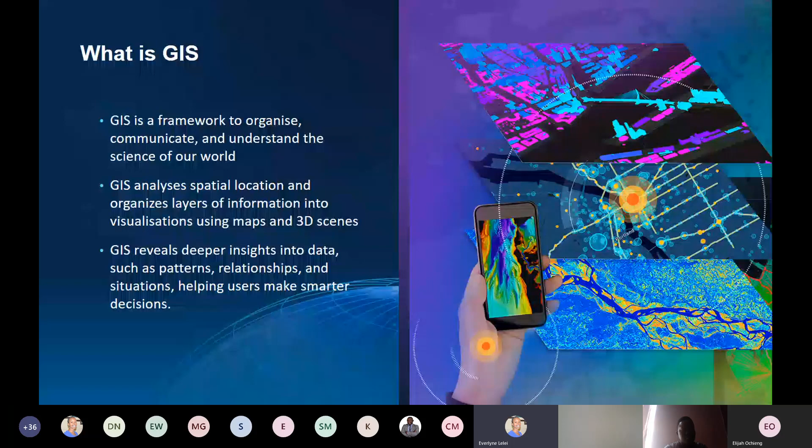So the GIS we're talking about is based on what we call the ArcGIS platform, the Esri ArcGIS platform. This platform includes distinct product offerings and solutions that work well together, with different components of this product.

We have desktop solutions and applications like ArcGIS Pro. We have applications and solutions that you could use on the web, and so on and so forth. The beauty with this platform is that you can actually work anywhere at any given time. I'm going to take us through this in a short while.

So what we're actually looking at today is GIS providing both the framework for analysis and decision making in real estate for this particular webinar. Think of the data sets where you get data integration and management, having to visualize that data through mapping and visualization. Then the core, one of the main strengths of this platform, is actually the analysis and modeling. From there, you can do your plan and design.

All these processes that we're talking about definitely lead to informed decision making, and after you've made your decisions, then you're able to take action. So this is what this platform can do — GIS providing both the framework and the process for analysis and decision making.

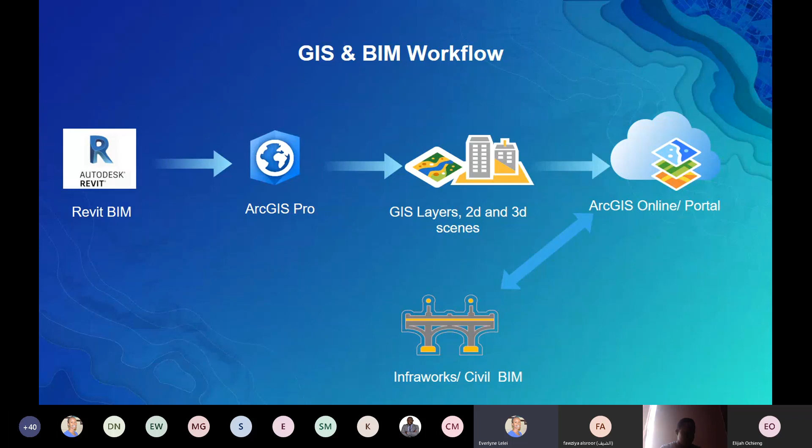So in terms of the integration patterns between both GIS and BIM, we have data in different file formats. And I think one of the main challenges has been because we didn't have the interoperability between these products and solutions before, but now that is actually possible with the GIS and BIM integration.

So you can have data sets in different file formats. If you're working with Revit, you'll have Revit files. If you're working with InfraWorks, or any other CAD data sets, you can actually have that brought into ArcGIS - that is the ArcGIS desktop, which for the purposes of this presentation is mainly ArcGIS Pro.

And then the most important thing that I also need to mention is that for this particular integration, we have the design software plugin. I think what we're mainly going to look at today is using the Autodesk connector for ArcGIS, so then you're able to connect to the ArcGIS Online platform.

So then after you've gotten your data sets to the desktop application, then you can be able to publish that to ArcGIS Online. And then on my screen, we have desktop, web, or mobile.

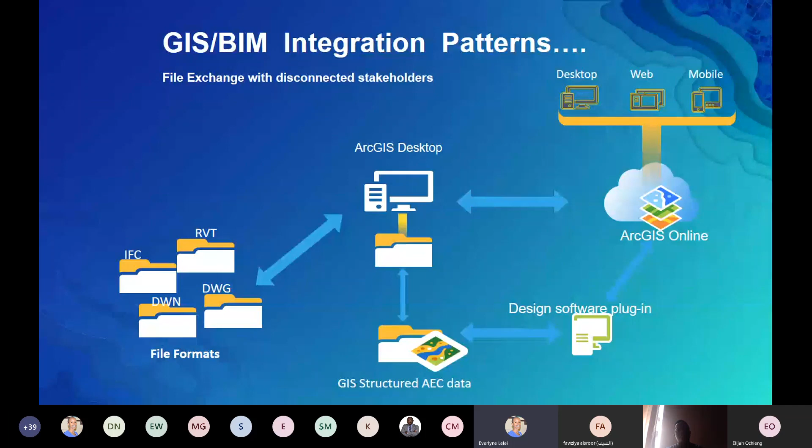So you can actually be able to create applications that can be accessed and used on the desktop, on the web, and on various mobile devices. So this is, I thought this is really important to point out even as we go through this presentation.

So my role will be mainly to show us how we can be able to use GIS to identify potential sites for real estate development. So I'm going to provide the context.

So the first thing, one of the main things that you can actually be able to do with GIS is analysis. And so before you do analysis, of course, you have to determine the criteria that you're going to use, and get the required data sets for that particular analysis that you're going to carry out.

Then, of course, there will be an aspect of reclassifying the data sets and carrying out analysis to be able to get which are the most suitable sites.

So Elijah and I are working on a project in Kisumu. I'll be taking us through analysis in the demo, showing which are the best sites that you could actually use for real estate development in Kisumu.

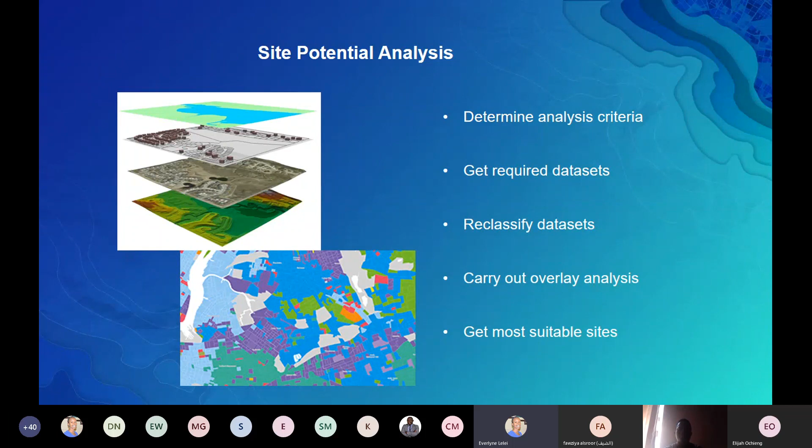So my analysis will mainly be raster overlay analysis. And then the data sets that I'm going to use, I'm going to have the DEM. And then from the DEM, I'm going to extract surfaces - I'm going to extract the slope and aspect from these.

Then one of the main other aspects that I thought is important when locating is proximity or access. So access is one of the main things that we are going to consider.

So for the purpose of this presentation, I've mainly taken those factors, but in case you need to do analysis, you can add in as many other factors as possible. But for the purposes of this presentation, I'm only going to take us through that.

So for this analysis also, we're using the model builder. With the model builder, you're actually able to automate geoprocessing tools, as opposed to having, say for example, you want to do analysis and you want to run each individual tool one at a time.

So using the model builder, we're able to automate these tools and have one final product. Since this is a multi-criteria analysis, we're considering various factors we can use for our analysis. We're mainly going to use the model builder for ArcGIS in ArcGIS Pro. I'm going to take us through that shortly in our demonstration.

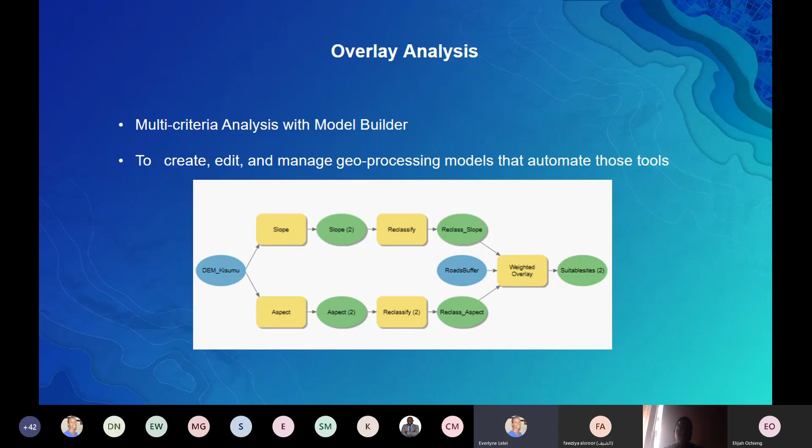Then, after identifying the potential sites for real estate development, you will go and do site assessment. Some of the factors you'll be considering are sunlight direction and wind direction, mainly for orientation, determining how you're going to orient the various buildings and facilities within your site. We're going to look at these shortly in the demonstration.

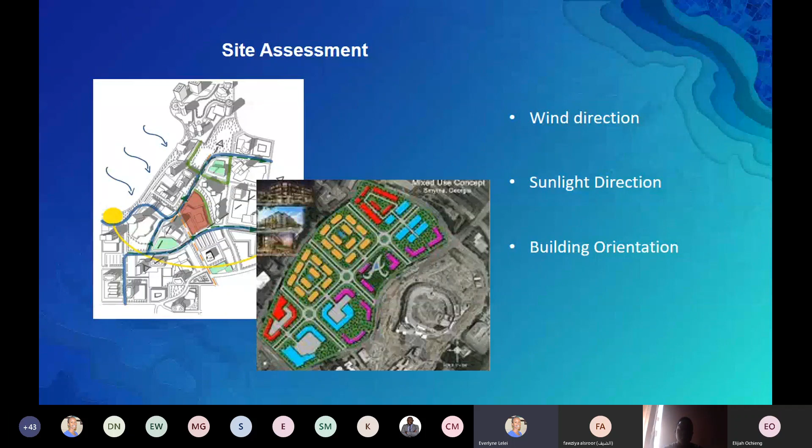So I'm going to hand over to Elijah to take us through the BIM bit, then we will go to the demonstration. Elijah, take us through the BIM bit.

Thanks, Everlyne. I'm just going to take you through a brief introduction to BIM and look at how it integrates and works with GIS. As Everlyne said, GIS provides us with the context, but BIM provides us with the content, because before you go out there and start constructing, you need to know how the environment looks, and how whatever I want to build there impacts the existing environmental and other factors. So BIM basically focuses much on the design, from design to construction and even operation of the same.

There are a number of benefits of BIM. Briefly, it is a process of creating and managing all information on infrastructure projects, both building and infrastructure, before, during, and even after the construction. So before, we are looking at the design phase; during, the actual construction itself; and after, basically the operation and maintenance of the same.

So it's the creation of a digital model of the building, which allows the designers and operators to interact with the building before it's actually constructed and after it has been constructed.

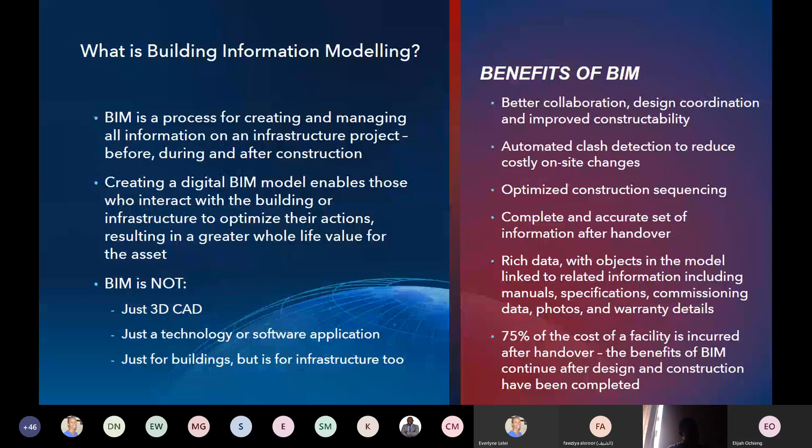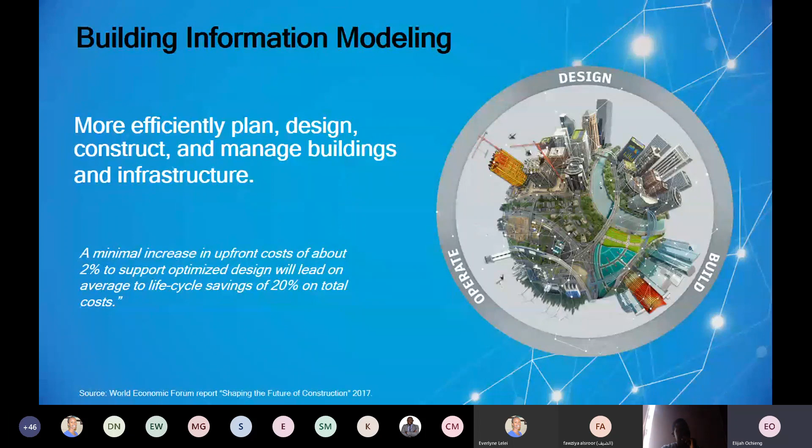You can move to the next slide, please. This is the introduction I like most: basically calling it a way of efficiently planning, designing, constructing, and managing buildings and infrastructure. A number of those who have used the process have reported at least 20% savings in the overall project life cycle, but they only need maybe about 2% to support the optimized design, basically integrating the entire process of the designing. Next, please.

When you talk about design, many people usually look at design just as one overall step, but design has been split into several phases. It can have at least 3 phases, but some can even go to 4 or 5. So when you talk about at least the 3 phases, we have the planning phase, concept, and the detailed design phase.

It's this planning phase where usually we'll find a lot of integration, trying to bring in the context of what you are designing into the actual design phase. When you do this kind of integration, where we directly integrate GIS and BIM, we'll be able to ensure better plans, which will also lead to better design in terms of operation, and also be able to identify some of the problems we usually face when we just go out in the field without trying to analyze and understand the context before construction starts.

During the BIM processes, you don't just construct, but you also have a chance of simulating the process of construction, such as the scheduling, costing, and timelines, or basically some of the issues you're likely to face when you just go directly into construction.

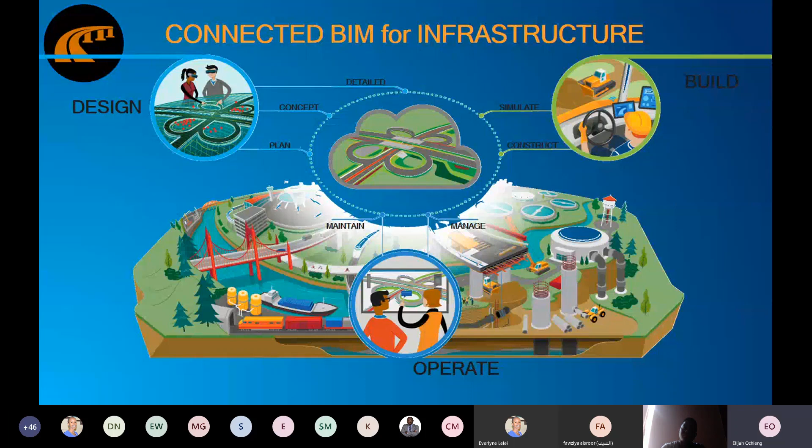And the information that was used at the design phase and the building phase can also be directly given to the authorities, like maybe some municipal, or it may be for a real estate development agency. That information can be given to them to be able to use during the operation and maintenance phase of the project that was constructed, when you use a digital BIM platform to implement your construction projects.

The main reason of this integration is basically that, as was also highlighted at some point within the presentation, the two technologies are interdependent, in that one informs the other, and the other also fuels what is required in the other technology. So BIM basically is going to provide more information to the GIS with respect to what is being provided, but GIS provides BIM with the context of what already exists there.

So BIM information is repurposed from the design data and can be a great source of information for the ongoing operation. So if the managers or the operators of the infrastructure building need to get that kind of data, they can quickly be able to get it from a BIM model. But GIS gives us the context on which we need now to do this kind of operation.

So currently, people face a number of challenges when they try to work with these two technologies together. Not that people have not been using BIM and GIS, but the conventional methods have a lot of limitations and challenges when people are trying to bring these two systems together.

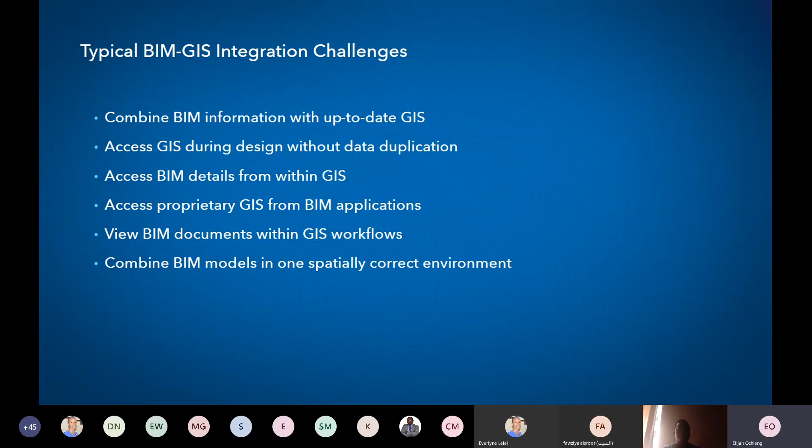Getting up-to-date information once you have started your BIM process is usually a challenge, and also accessing the GIS during the design without data duplication is sometimes a very important challenge, in that there's a lot of duplication, especially if you can't know what's the version, what's the changes that have been made over a period of time. Basically those are the challenges that we are trying to remove when we do this kind of direct integration with the two platforms.

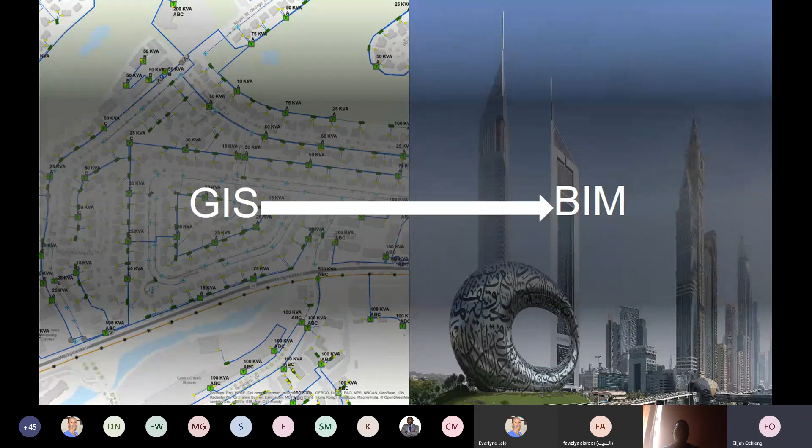So this now gives us an overview of how these two systems look like. As we had said, GIS provides us with the context. Context could be like the existing utilities, the underground pipe networks that you could be looking at within a project area - that's like the sewer lines, water distribution networks, could be the roads, could be the buildings, the conservation areas. Once we have correctly understood how they are going to impact our project, we can now finish our design work, come and construct them within the context, based on the analysis that you have done on the GIS platform, without any challenges and difficulties that are usually faced.

So in summary, the process of planning, designing, and building requires a context. GIS gives us the context, but BIM provides us with the content. Context is basically the existing roads, existing buildings, anything that you may find on a potential project site. So before you go to the actual construction, there's need for you to perform a proper analysis and understand the impact of what you are going to build there on the existing site, and also the impact of the existing site on what you are going to build.

And basically, these are some of the analyses that we'll be looking at when we're doing our demonstration - things like maybe traffic, things like flooding.

So this is how people are currently working. We say that it is very inefficient, where you need to get GIS files in different formats. You may be having PDF, you may be having raster, shape files. So when you want to work with them in your CAD, which is the conventional method right now, you need to save them in different file formats and add them manually. And once I've finished with my design, if I need to share that information again with the GIS experts or GIS specialists, again, I need to do manual export of choosing the specific files.

You need to worry about georeferencing, which is usually a very big problem to those who are not surveyors. You need to know the specific coordinate system of a project area so that you can import a raster image, or so that you can import the correct file to basically give you that context in the background to work with.

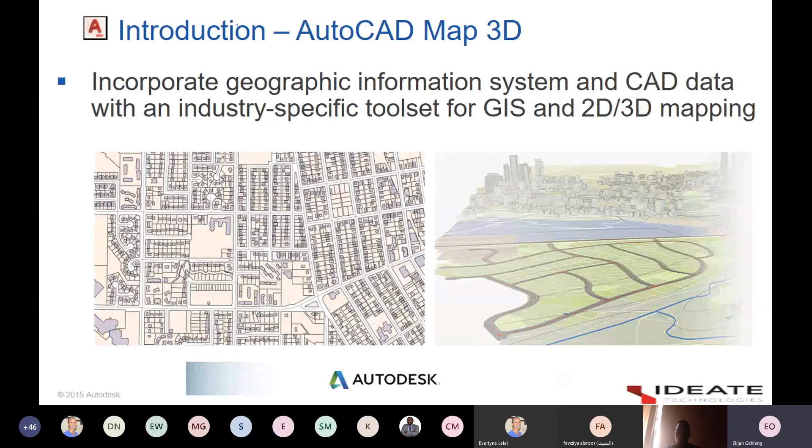If you don't know the coordinate system, this will not work. If you don't know the georeferencing of the area, that won't work very well either. The same even if you want to work with point clouds and any other kind of data that can be worked with in CAD and BIM, we all know the challenges that can present. That's why we are going to show you the best way of integrating these two in InfraWorks and ArcGIS Pro. So if you can move to the next slide.

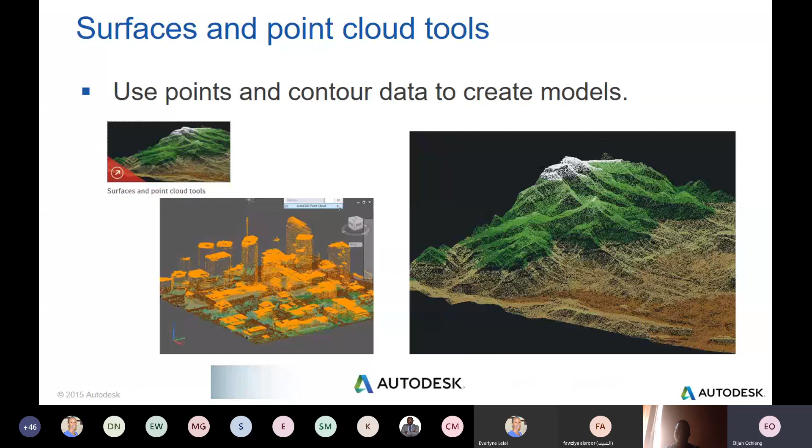The way we are proposing this to happen, as opposed to that manual integration of adding and exporting data, we are looking at a system where both GIS and BIM data can sit on one platform. Whichever phase of the project you're working on, whether planning, design, build, or operation phase, you can add into it and get feedback out of that system in terms of the design, the context, the changes, the updates, and the analysis. And that also happens during any phase of the project, whether operation or maintenance. So that's what we're looking at in terms of putting data at the center, because data basically influences everything.

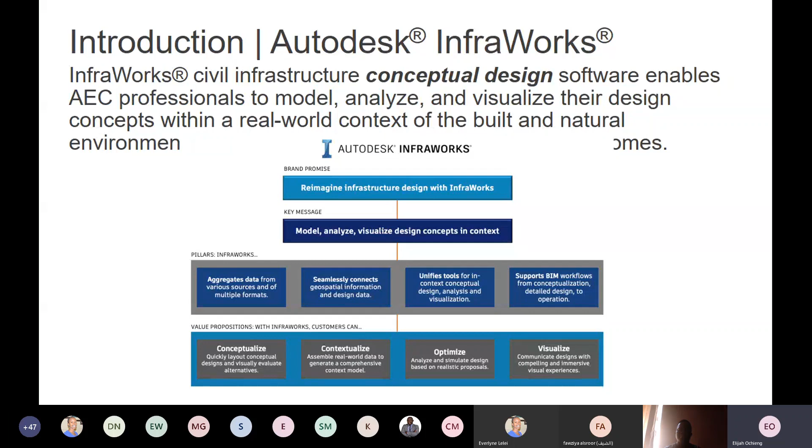The system that allows us to have such kind of integration in form of GIS and BIM, or basically GIS and design phases, is Autodesk InfraWorks. It's one of the greatest BIM solutions in the market right now, which allows you to integrate a number of technologies in terms of combining different data, whether it's data of the design phase, construction phase, operation phase, and also various contextual data in terms of GIS for that particular project area. So it has a number of functionalities and features, as you can see on the screen.

It can quickly enable you to generate the context in terms of adding the project area. When you want to start a project, it's just a matter of defining the project location, either by name or by coordinate. Once you identify the project, you create the context by defining the project boundaries, or you can import that from a predefined shapefile. Once that is done, it will give you freely available context data in terms of existing roads, existing buildings, DTM, and imagery on the background to enable your work.

Once that's done, you can quickly move into the project and start understanding what is inside it. This shows that sometimes even before you go to do surveying work on the ground, you can have some data within InfraWorks to start with. But once the survey work is completed, because survey forms a very integral part of any design process, InfraWorks will give you some information to start with in terms of the existing information on the ground.

Once the project is mobilized and the surveyor has captured some information, you can bring it in and integrate it with InfraWorks. The same also applies to the planning phase, where we now need to start leveraging some GIS data, where we can directly link up with ArcGIS Online to access the data that was generated in ArcGIS Pro based on the kind of project we are working on.

At the same time, you can now start communicating and sharing the information with the various project stakeholders at any phase of that particular project. Then after which we can now move to the various design phases of the project. Next, please.

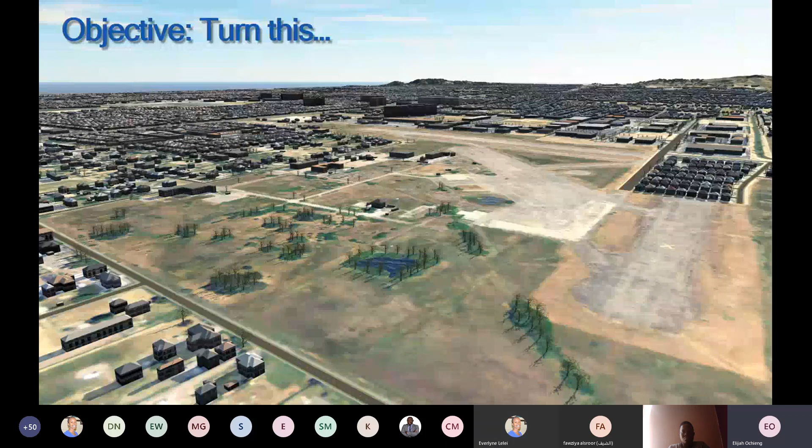The main objective of any design process is that Evelyn will be able to perform analysis and identification of the correct site, which would look like an open land with some buildings, the project area, existing roads, existing water bodies and things like that. Our main objective is to turn this into a developed area with proposed roads, proposed buildings, parking lots, recreational areas and what have you. So that's what we're going to look at: how we can start from an open land and convert it into this kind of model, which is very easy to understand.

If you've seen a building plan in CAD compared to what you can generate in InfraWorks, you'll understand this is much easier to grasp. You don't need any technical background to understand what someone is trying to depict in this project, as a non-technical stakeholder involved in a particular project, because not all players in real estate are technical.

In summary, BIM and GIS workflows are supposed to happen continuously, because the built environment changes every day. You could be walking in a particular area, and within two or three months a building is done there and people are occupying it. So both systems should always integrate and happen continuously — GIS gives us the capital portfolios, while BIM gives us the capital projects. Portfolio is basically what already exists, but BIM gives us the projects being developed now, at whichever phase they are in.

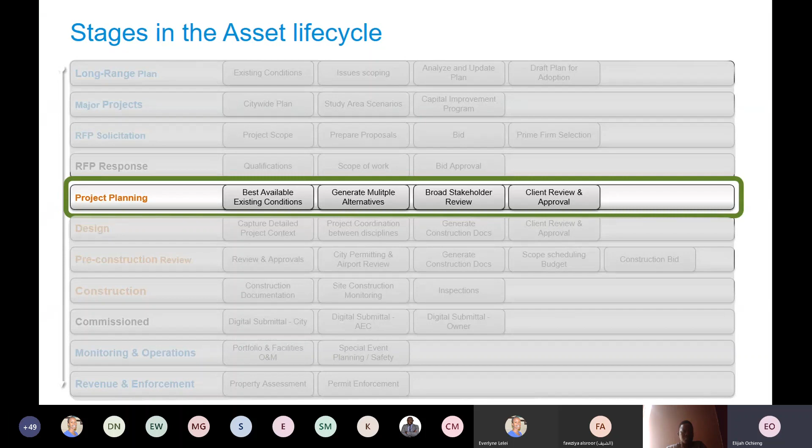All these processes can happen at any phase of the project, but today we are only going to focus on project planning — the various analyses performed, how we can evaluate existing conditions, generate multiple design alternatives, and even engage stakeholders by sharing design data without requiring them to install anything or learn the various systems we use. We want an easy-to-understand system so a non-technical individual can quickly grasp what the designers and engineers are trying to communicate.

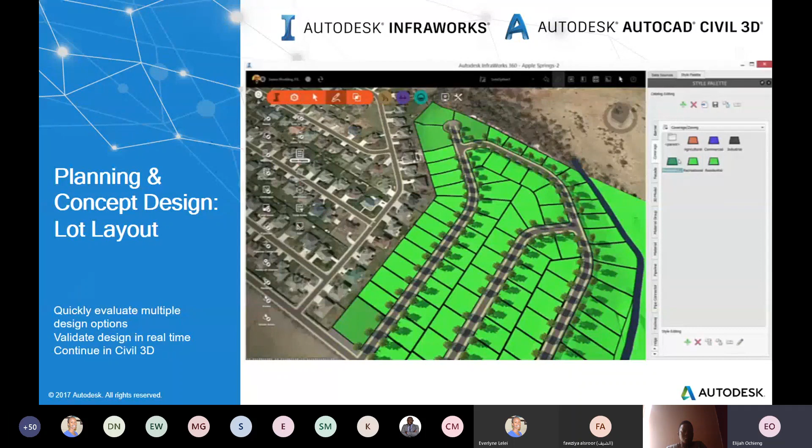For example, in terms of a plan, we want to develop something like this — common among planners, surveyors and engineers. Instead of presenting it in CAD, we can show it in an intuitive 3D model, showing the plan and how it integrates with existing features on site, like water bodies, rivers, infrastructure such as roads, trees, and so on. We'll see that in real time during the demonstration of various design alternatives. That marks the end of the presentation.

So maybe you can go to the demonstration now, starting with Evelyn.

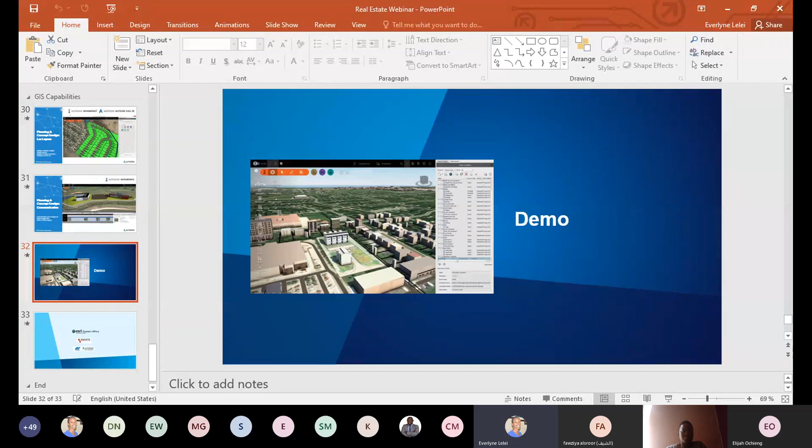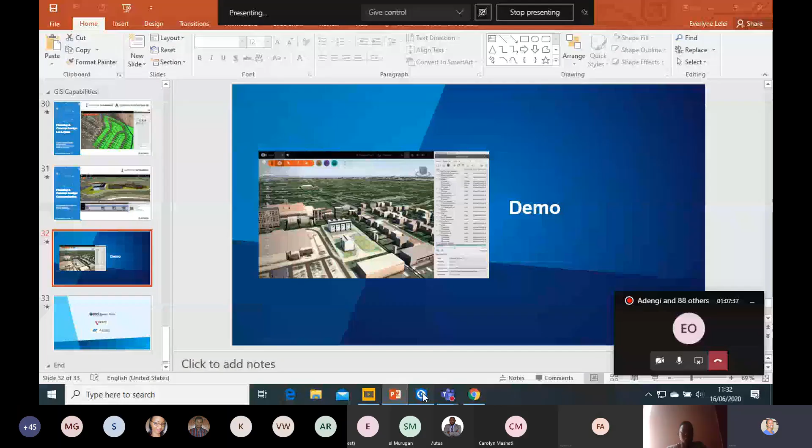Thank you, Elijah. The next bit is the demonstration, so I'm going to provide the context — just give me a few minutes to share my screen. Hope you can see my screen. This is ArcGIS Pro. I'm going to do the analysis on ArcGIS Pro and then provide the context for Elijah to do his development.

ArcGIS Pro is one of the main desktop applications within the ArcGIS platform, with a ribbon-based interface similar to Word, so it's quite user-friendly. We have various tabs — Map, Analysis, Edit, Imagery, and others. It's also a 64-bit application, meaning faster display, faster processing, and faster analysis capabilities. On the right, we have the catalog.

Similar to what we had in ArcMap, the catalog has different folders. For this particular webinar, I created the project — when you create a project, it automatically creates a project folder for you. So we have the real estate webinar project, and the real estate geodatabase here.

So we are working with a file geodatabase. Think of a file geodatabase as a container which allows you to have various data sets. You can have raster data sets, you can have vector data sets within a geodatabase, you can have tables and so on and so forth.

So I have various data sets that we are going to use for this demonstration. I talked about 3 factors that we are going to consider. So I'll have the DEM for our area. We are working on a project in Kisumu, so I have the DEM for Kisumu, which we will use to extract both slope and aspect.

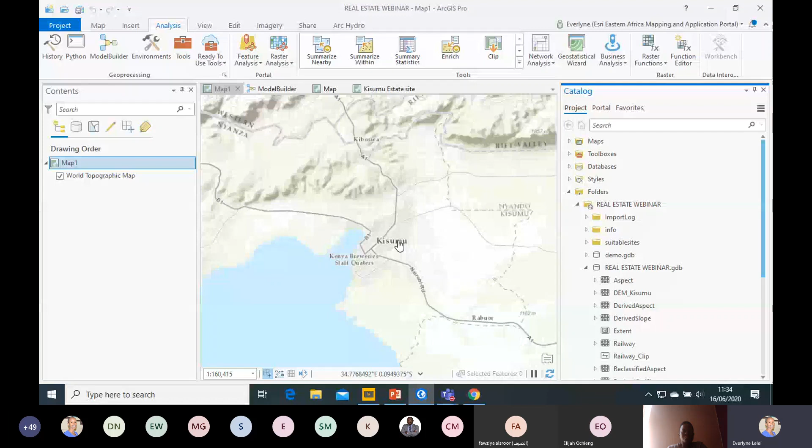I also have data sets on roads, mainly for accessibility or proximity, ensuring that the area that we're going to develop is actually accessible. I've actually done most of the preparations before, like converting all the vector data sets that I needed to use to raster, just to make this easier.

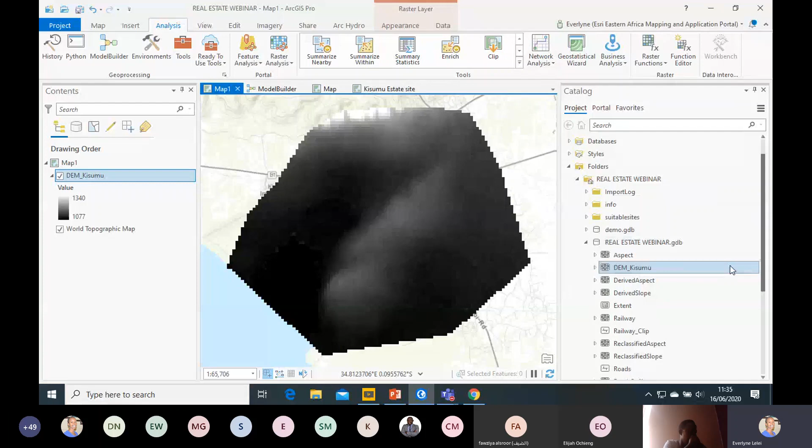So I'm going to add the DEM here. From the DEM, we're going to derive surfaces, both the slope and aspect. Then I'm going to also add in roads data sets. As I mentioned, I had already done some of this before this presentation, just to make it easier.

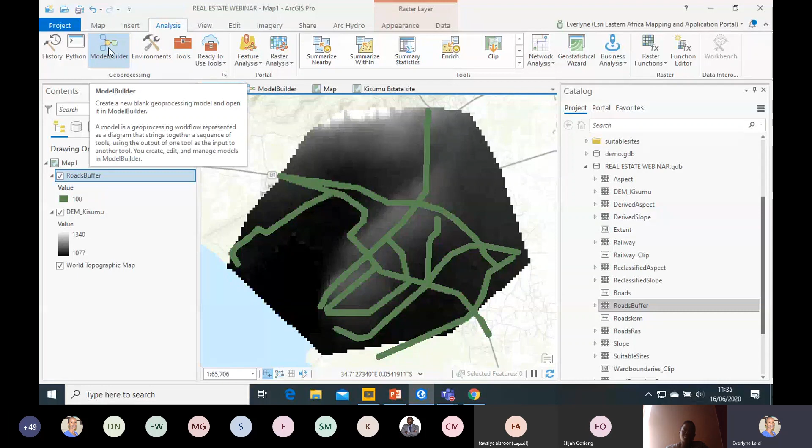For this particular analysis, when you're doing analysis, especially multi-criteria analysis like what we're going to use right now, it's actually important to work with the model builder for ArcGIS. This allows us to have different geoprocessing tools or different analysis tools and run these tools to actually get an output. So I have the DEM and I have the roads data set here.

So when I click on the model, it actually opens the model builder here. We're actually going to build a model that is actually going to do the analysis for us to be able to determine the best sites for us to actually be able to develop within Kisumu.

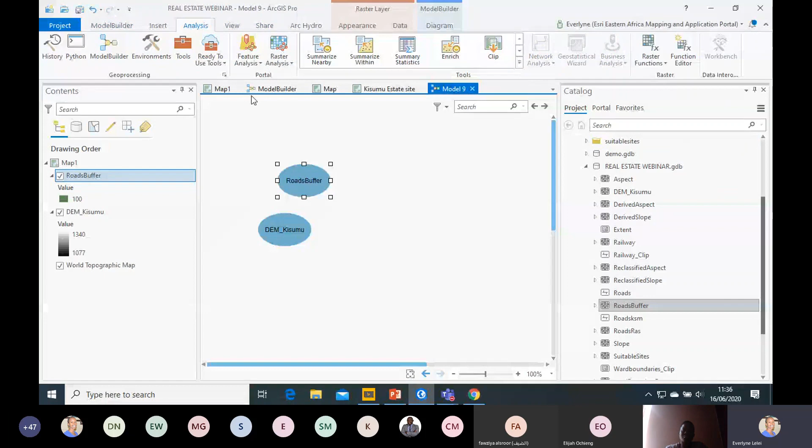I'm going to add the DEM data, and I'm also going to add the roads data. Then the next thing that we are going to do, we have various analysis tools. We have very many analysis tools. So for this case, I'm going to go to the spatial analyst tool.

Under geoprocessing tools, we have various tools for analysis. So I'm going to go to the spatial analyst tools, and then I'm going to go to surface tools, since we're going to extract or derive surfaces from the DEM. I thought slope and aspect could be one of the main factors that you actually consider when choosing a site for development, but you can add in as many other factors as possible. So this is just for demonstration purposes.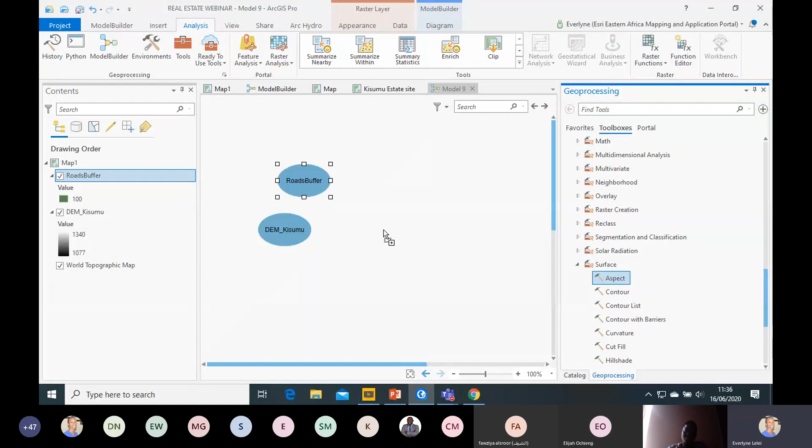So I'm going to drag the tool here. Let's just give it a few minutes. I think it already did 2 of them. Let me just delete one. Yeah, so here we are.

So this is the tool that we're going to use to derive aspect from our DEM. The input raster will be the DEM for Kisumu, and then the output will be the aspect that we will have derived. So let me call it aspect derived, so that doesn't confuse me.

And then I'm going to work from the geodatabase, I'm going to save everything in my geodatabase. Once I click OK, you can actually be able to see what I have here. The blue elements are the input data sets that we had, for instance, we have the Kisumu DEM, and then the yellow elements are the geoprocessing tools that we are going to use for analysis. And then the green elements represent the output.

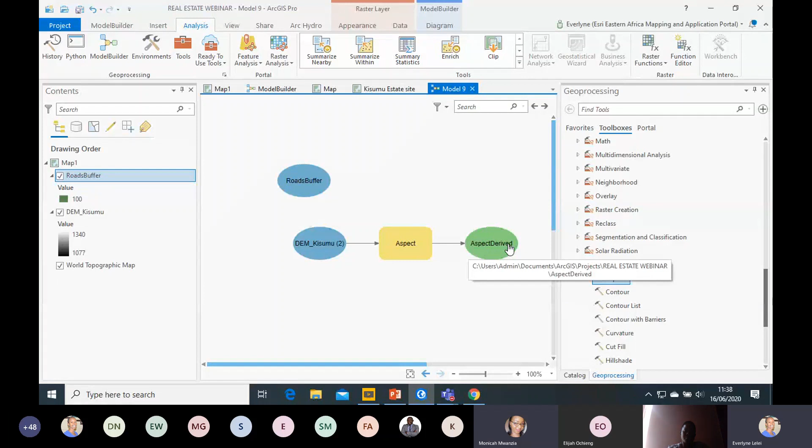So we're also going to do that for slope. I'll simply come here, add the slope tool, same process. So let me call it also slope derived. Yeah, so again, it's showing that we are getting from the same DEM, which is our input, both aspect and slope.

Then the next thing that we are going to do after generating the surfaces is actually reclassifying our data set. We are working with the same number of classes, so I'll have a uniform number of classes for all our data sets. I'm going to search for the reclassify tool. So all these are geoprocessing tools in ArcGIS Pro. Yeah, so we have the reclassify spatial analyst tool. Then my input will be the surfaces that we've derived, both aspect and slope.

So we can start with aspect, and then I'm going to input the number of classes that we are going to have. Just a minute. Let me just call it... so this is reclassified aspect. And we are still saving it in the same geodatabase.

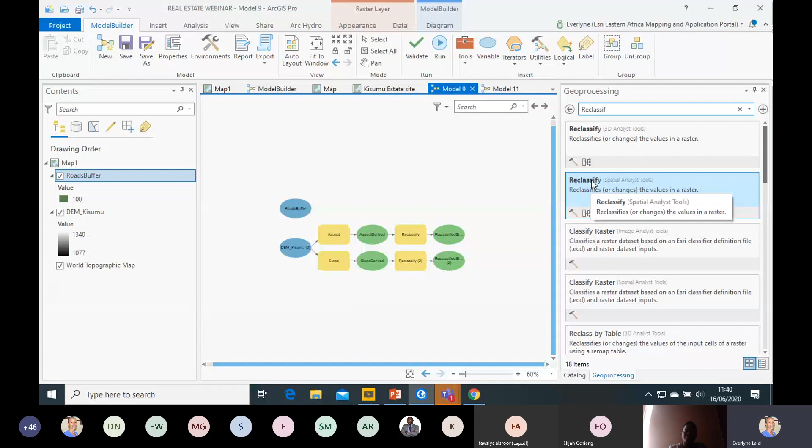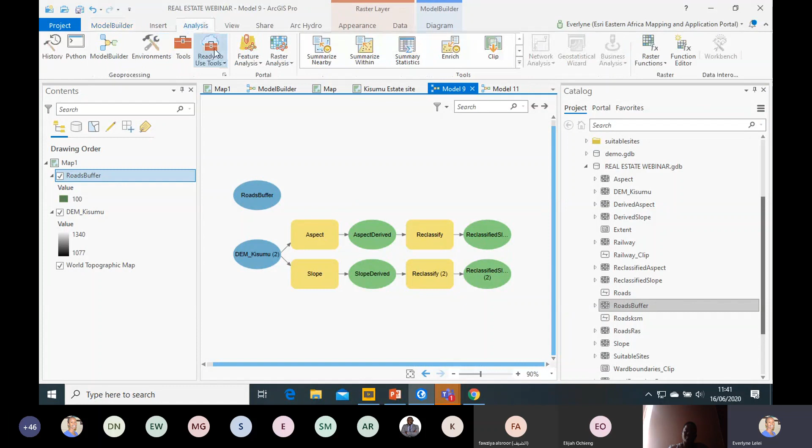So once we've done this, we'll now overlay all the data sets that we have, then we'll be able to get the most suitable sites for us to develop. So still, I'll come to my analysis tools.

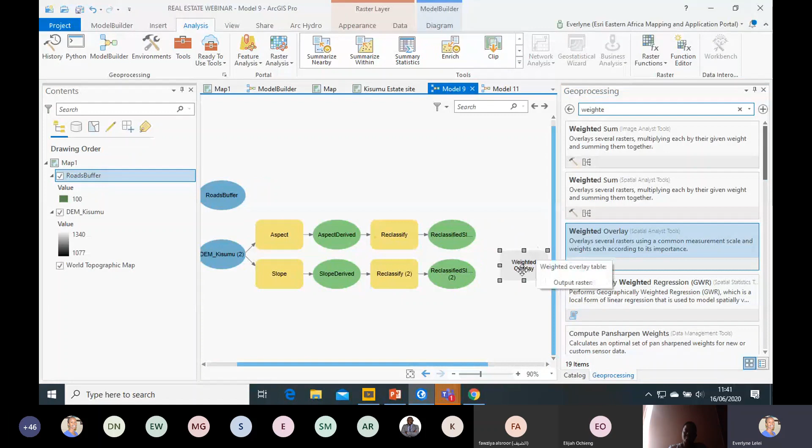Look for the overlay tool, so we're doing a weighted overlay. I'll assign different weights to different data sets. I'm going to add in the data sets that we have reclassified, that is the slope, aspect, and the roads data sets that I had already prepared. So I'm just going to browse to my location where I have my data sets.

So we have them here under the real estate webinar geodatabase. I have the derived aspect, the reclassified aspect, the reclassified slope, and the roads buffer. So I'm going to pick these three.

And then you can assign different weights to different data sets. With weighted overlay, you assign weights to the factor that is most important to you when determining the most appropriate site. So maybe we give aspect 30%. Maybe the most important factor for us will be slope, so we can give that 40%. And then we can give maybe another 30% to roads buffer.

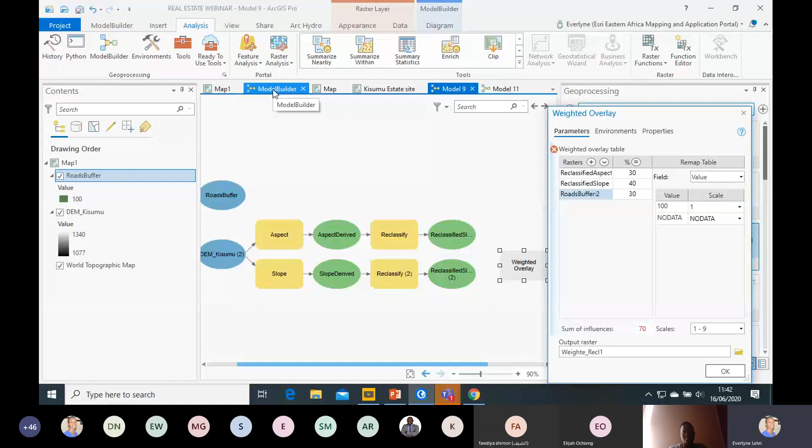Again, this is for demonstration purposes. You can refine your data sets as much as possible. So running this will take a while. I had already had something run, but once you're done, you just click OK, and the tool is going to run and you get your output.

This is what you actually have after doing the analysis. So after the weighted analysis, we'll have the most suitable sites for development. Again, I just used those three factors, but you can use as many other factors as you want, depending on how you want to refine your analysis.

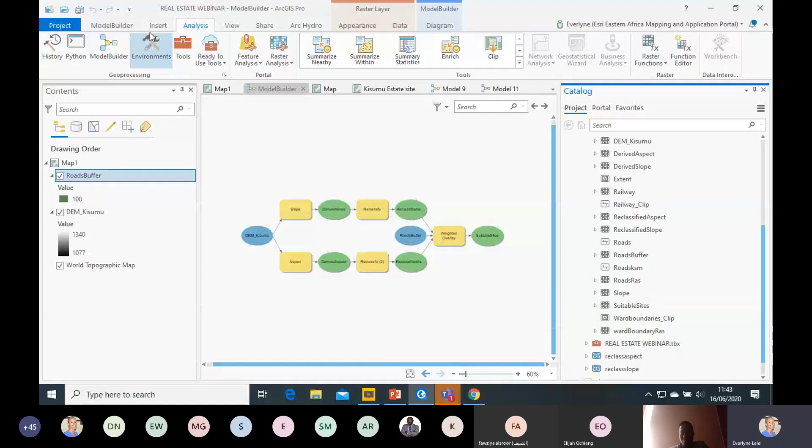After doing that, you'll have the suitable sites as a raster layer, which you can now add to your data. I still have, on the same geodatabase, the layer on suitable sites. So I'm going to insert a map and show us how that looks like. Let's give it a few minutes.

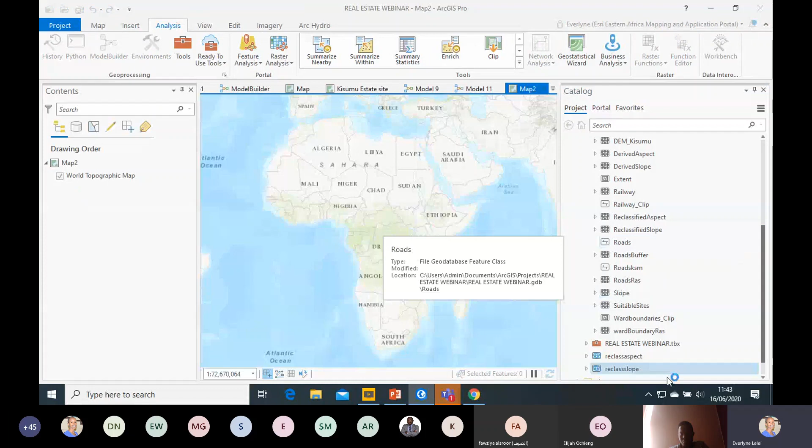So after running the analysis, you will get an output that just shows the suitable sites. On a scale of 1 to 3, we have most suitable, suitable, and least suitable. Number 1 are the most suitable sites, then the second one suitable, and then we have the least suitable sites. So after running the suitability analysis, you know which areas within Kisumu we can develop.

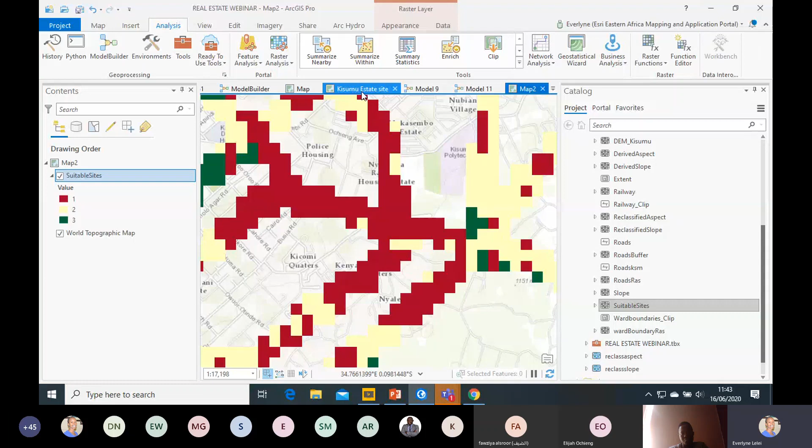Then you will now go ahead and do a site plan, just a layout showing where the different things will be. For the purposes of this demonstration, I also had that ready. So we have a layout within Kisumu for a site that we actually want to develop.

From this site plan here, I can actually show where we have the proposed transportation network, proposed drains, existing roads, proposed sewer lines, and so on. So I actually have these data sets. These data sets form the context or the basis for the design that Elijah is going to do in InfraWorks. For him to be able to access this information that I have already prepared in ArcGIS Pro, I will need to publish this information to ArcGIS Online.

So under the share tab, this is where we're actually going to share or publish this information to ArcGIS Online. I'll publish this as a web layer, and then Elijah will be able to connect using the Autodesk for ArcGIS connector. He will be able to actually access this information from ArcGIS Online. Let me show you how the publishing is done, it'll take a few more minutes.

This is going to provide the context. I have done everything, so once he gets these data sets, he won't need to worry about anything except doing the design. Let's call it Kisumu, or let's just name it real estate webinar. And then maybe this is for demonstration purposes.

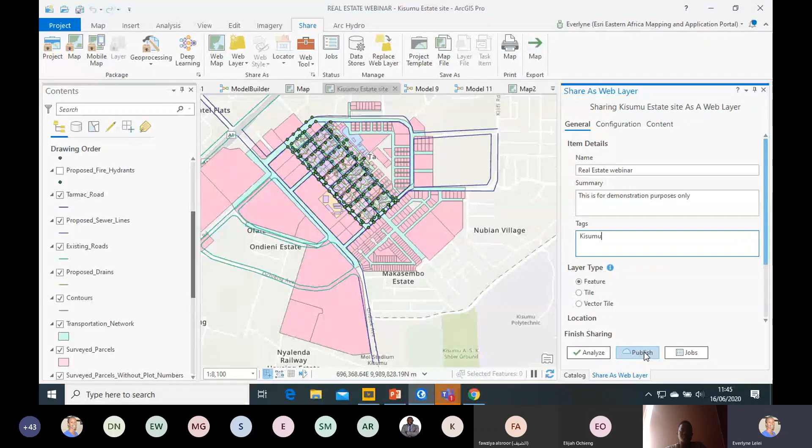For the interest of time, I already had this published, so I'm taking us to the ArcGIS Online platform. To access ArcGIS Online, simply come to arcgis.com, and you will be prompted to sign in with your organizational credentials. I'll put in my username and password, then I'll be able to access the ArcGIS Online account. Once I click sign in, this is the interface I will actually get.

Let's give it a few minutes. Yeah, so this is the interface that I will actually get. This is ArcGIS Online, and I'll publish my data here.

I had that already published. So from my content, we have Kisumu real estate webinar. I had already published the data to our ArcGIS Online account, so Elijah will be able to access this information from there. This is how the data that we have published actually looks like.

I'm just going to open it in Map Viewer just to show that we actually have the same data sets that we had in ArcGIS Pro. Let's just give it a few minutes.

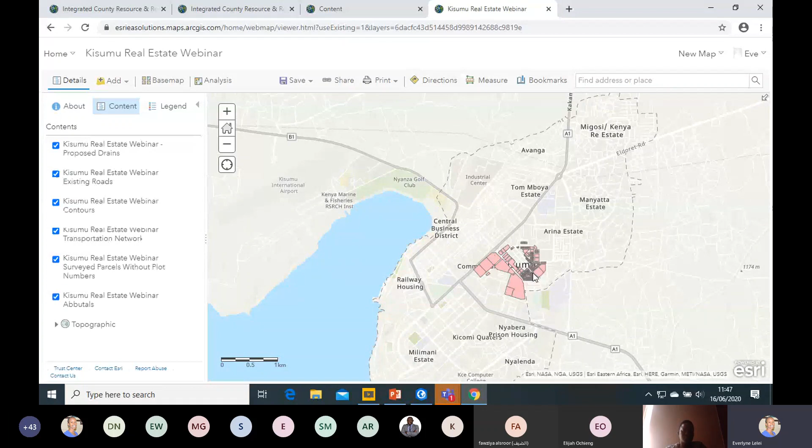Yes, so this is the data sets that we had in ArcGIS Pro after doing our analysis and our site plan. We have the same data for our project area in Kisumu. So this now provides the context.

Elijah is going to take us through the next bit, the next demonstration, where he's going to access this data and actually design our site in Kisumu. So Elijah, take us to the next bit.

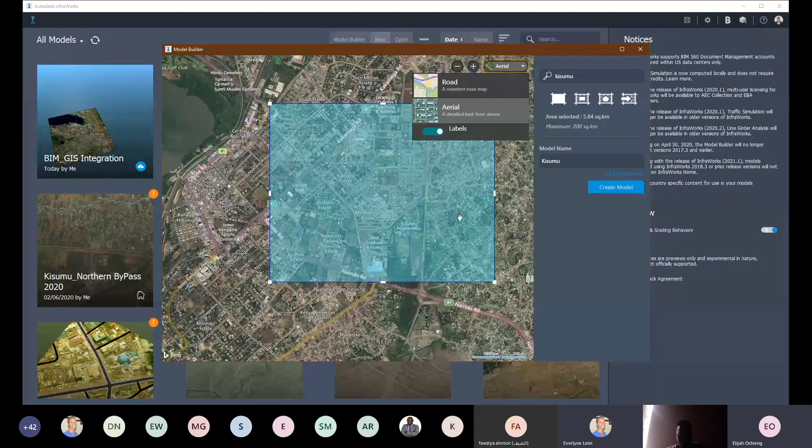You can also choose the map from a road, standard road map, to the aerial or satellite. Then you can see your project in a more clear way in terms of the existing area there. So then I'll just click on create. Once that is done, it usually takes up to sometimes 3 minutes, depending on the speed of your internet connection and also on the size of the model that you are creating.

Once that's done, I'll open the existing one here, which I already started off with, so that we can have a look at it. I'll just give it some seconds. So it will open up the model for me. Okay, there we go. So this is the project.

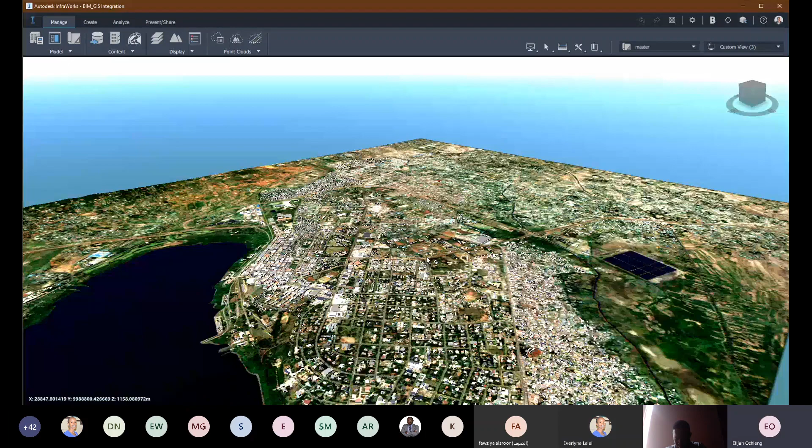As you can see, just very simple tools. I will not go into those ones now, but what I've done is I've saved the specific areas of interest. So like we have what you call a bookmark, the same way you can bookmark a site within your browser. That's what I've done. So I have my existing site.

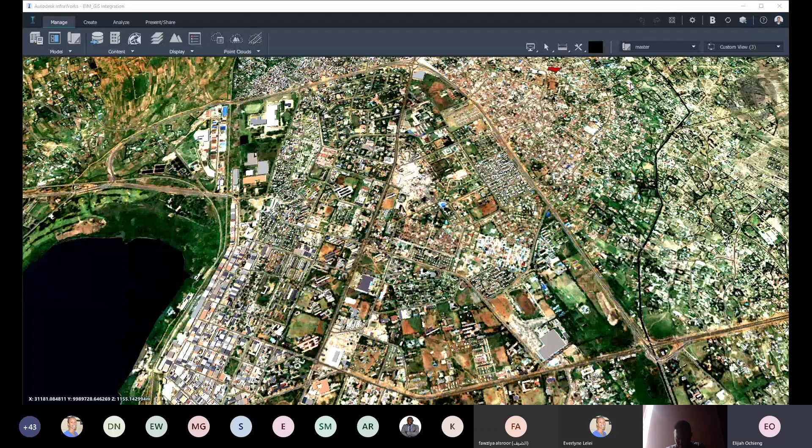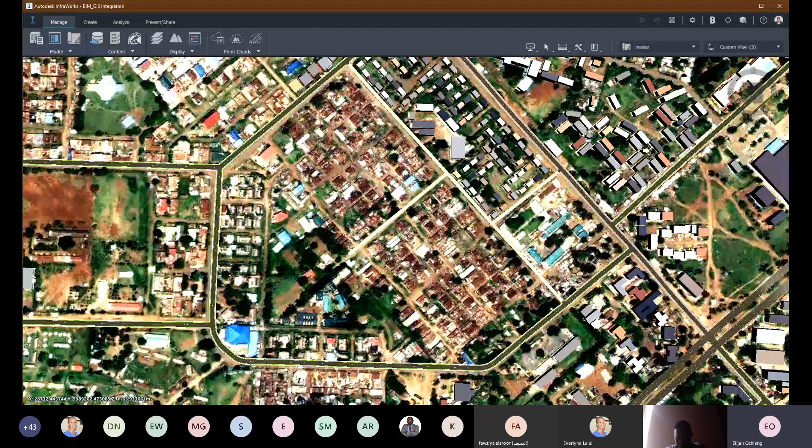This is the area where we are supposed to develop our project, and it was advised by the analysis that Evelyn ran in ArcGIS Pro, as you are seeing. So it's an existing residential estate, but there is need for its redevelopment. As you can see, we have some areas which look like existing footpaths, some small roads there, buildings, and what have you. So this is what we want to develop so that we can bring in new buildings and new roads based on the way that the planners have segregated it.

So what I want to do - the model that you get as a scratch gives you information about the existing roads. So like this is an existing road, planning roads, and sometimes some of the roads, if they are already classified roads, if you select them, it will tell you even the name of that particular road. So right now I've selected this particular road here. You can see on the top right corner where the cursor is, it tells me the name of that road. So basically that's what we're calling the context.

So as I have to develop this, I'll see like if I'm designing these buildings and these roads, how is my traffic within this residential area going to impact this existing Ondiek road. Because when you are developing this, there will be generated traffic, and also new roads will attract traffic. So how do you now plan to manage those generated and attracted traffic with respect to the existing roads on that particular area?

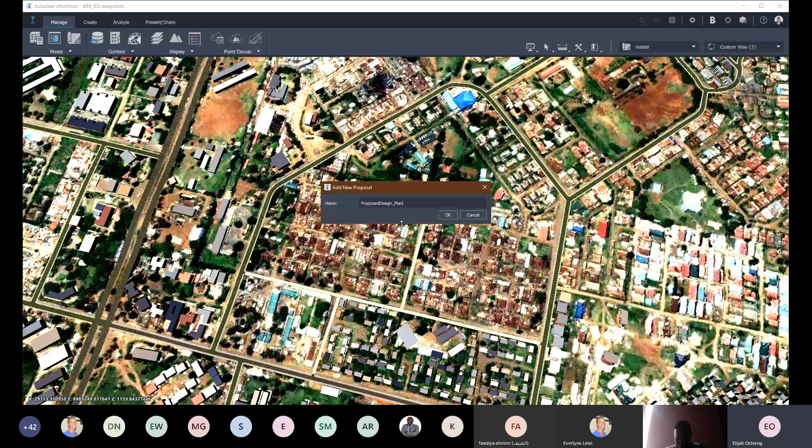So this is now called the master model because it's the model that you find when you generate it. It's advised that you should create a proposal on top of the master model just to allow you to keep on referring to the existing information, because you may not want to interfere with what was already existing. So you proceed by creating a proposal. I'll call this our proposed design or proposed plan. I'm creating an additional proposal in addition to what was existing so that I don't interfere with the as-is, or the context, before we add any GIS information.

So InfraWorks allows you to be able to generate that. I've created that new proposal. It's just a copy of the existing with the same information as they were.

So what I'm now going to do is link up with ArcGIS Online, where the data from ArcGIS Pro had been published, so that I can bring in the parcels, the proposed road corridors, and so on, the way they have been planned for this particular site by the planner. So remember, I'm playing the role of a designer. I do not really know how they are done, but my aim is to use them and show me the areas I should do my roads. For example, if I'm a civil engineer, or an architect and structural guys, my aim is to know exactly where the buildings should be done, the way the parcels have been subdivided.

So as we say, it's a very simple process. You don't need to worry about georeferencing and the coordinate system of the data the way they have been published. So on the Manage tab, that's on the top left corner, under Manage, I should go into the content.

Elijah, please reshare your screen. You can't see my screen? Yeah, please reshare it. It's not visible at all. Okay, let me share.

And now? Can you see now? It's visible, okay. Elijah, it's visible.

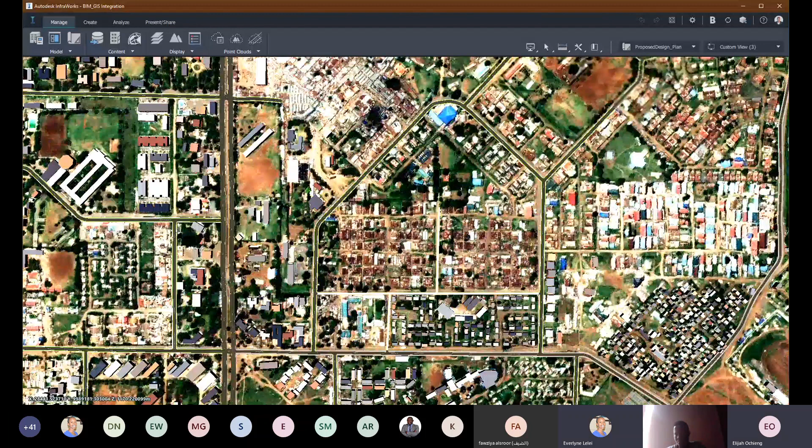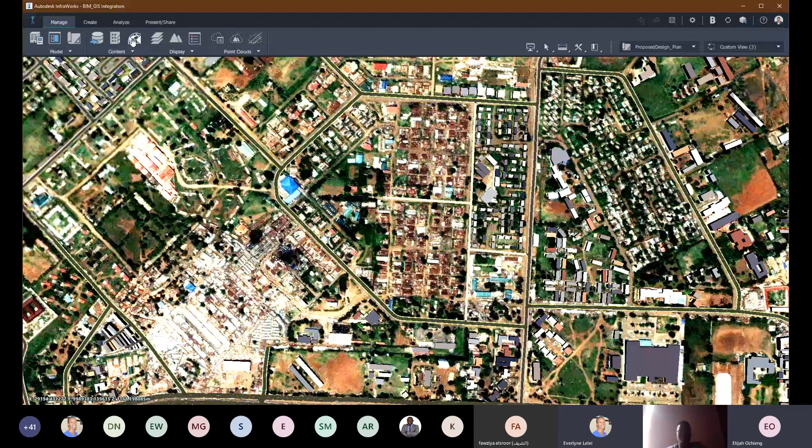So I was saying on the top left corner, on the Manage tab, I'll be able to access content, and you can see there is an icon there for Autodesk Connector for ArcGIS. That's the icon I'll click on to allow me access ArcGIS Online.

Immediately I click on it, and again confirm that you can see that window. It's a whitish window with the top left written Autodesk Connector for ArcGIS. So what it does, it takes me into the cloud where Evelyn has published the GIS data, and you can see it automatically takes me to the cloud.

It remembers the project boundaries. I don't have to worry about georeferencing and the information about how the data were published.

So my aim is to just go into the content, which is my content right now, because they have been authored by our internal team, for example. Then I will search for that specific data. She named them as the Kisumu, so I'll search for Kisumu, for example, just to filter off everything.

Then I will click on it. So you can see it gives me the information about Kisumu, so I'll just choose the specific one. And once I've chosen that specific one, it will list for me all the possible GIS data that has been published by the planners from ArcGIS Pro.

So my aim, remember, was to bring in the proposed roads, proposed corridors, proposed building parcels, together with the existing, if I need to update the existing, as opposed to what I've already got in InfraWorks. So what I'll just do, I'll just bring a sample of them, because usually it can consume time to bring those, which we do not want to spend much time on.

So I'll just bring in, for example, anything to do with the parcels. I'll select proposed LPDP plots, that's the plots. And once I select it, I choose how I want them to be brought in InfraWorks. So I want that to come in as a parcel.

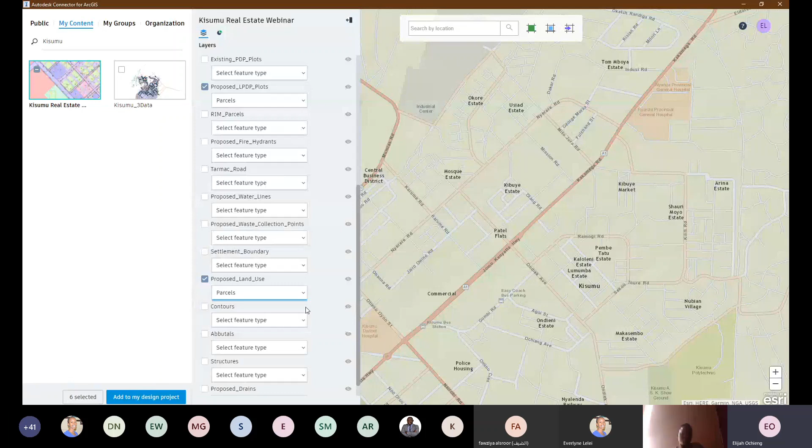So you basically see that it means that they're all going to be taken to the context of my project where I want to add additional design data. So I'll just click on add to my design.

And then it takes me back into InfraWorks, and it will read through the ArcGIS data, georeferencing and bringing them into the correct context. So she had proposed them in ArcGIS Pro, but now I want to use them within a design program without having to do the manual importation and exportation, and again, without having to worry about the coordinate system and the georeferencing things.

So I'll just give it some few seconds. It will bring them, and then you'll get to see basically how they now update the context of my design. So then after that, I can now start developing those roads into the actual designs.

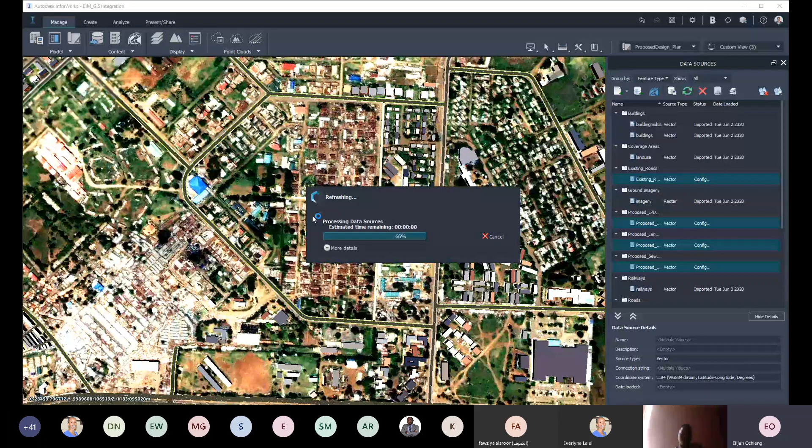And I can also even bring in the actual design models. So like, let's say the architect and the engineers who are designing in Revit, I can bring in the Revit models within the context of the building. So maybe I selected a multiple object twice, like I selected roads twice, but you can quickly see the parcels, for example, sorry?

Can you see my screen? Yes, your screen is visible.

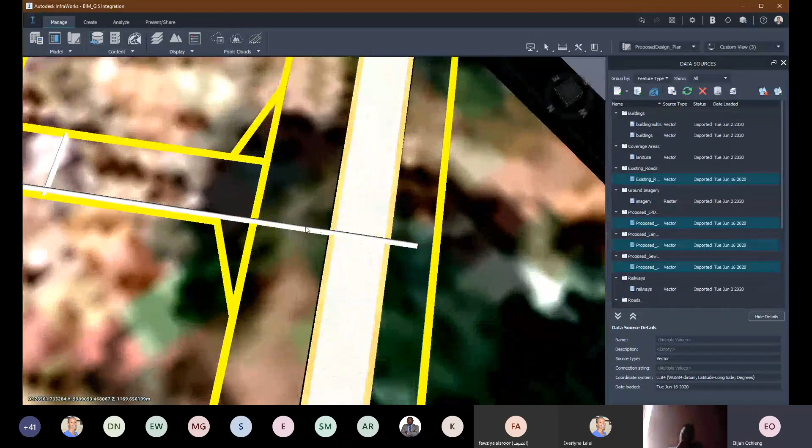So I was saying, for example, you can see here how these parcels have been subdivided. This is a proposed pipe network here. There's a proposed road reserve here, and you can see it also coincides with an existing road there. This is how the road corridors are proposed within the project area. I might have selected one of them twice, so that's why the two roads are overlapping on the same area.

What I've done is generate this beforehand, because I know someone doing this in a hurry, under time pressure, may not get it to come out correctly. So I created a proposal earlier where I brought in all of them the way you would expect them to look, and I'll switch into that proposal to show where I've brought all that information within InfraWorks.

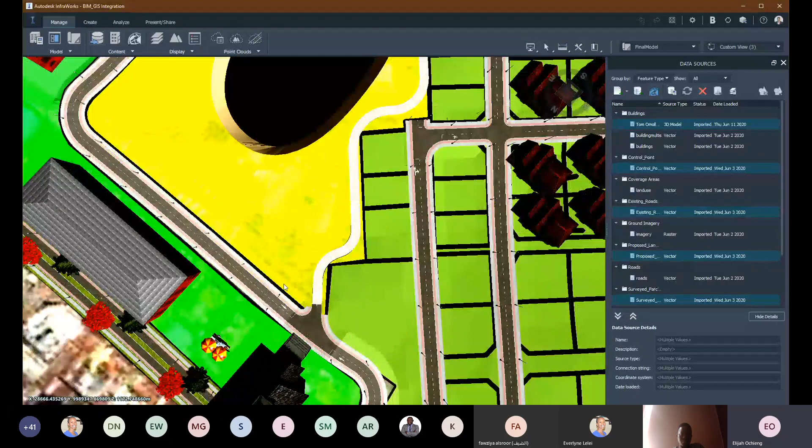So that's what I'm switching into. You can see here, I quickly brought it in so you can see the conservation or recreational area, these are the actual building parcels, and the roads.

If I go slightly below the ground, we should be able to see the pipe networks I was mentioning. I can see there's a junction of these three pipe networks. It could be for sewer lines or anything like that.

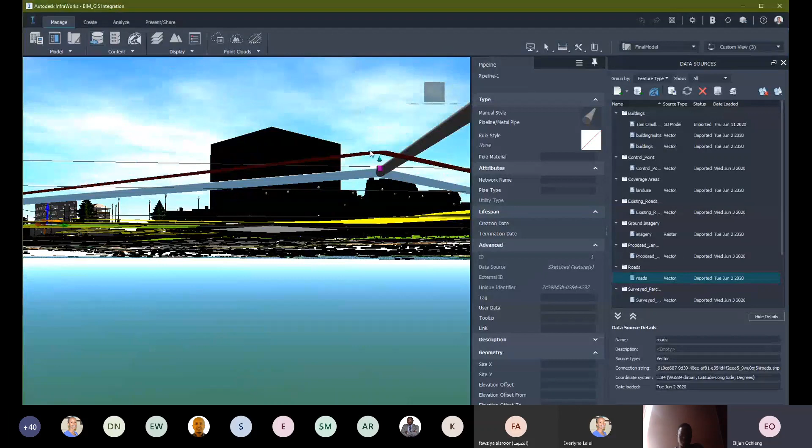So I'll take the next two minutes to show how we can add additional design information. For example, if I want to now add a road, you can see there's a road reserve here which is going to service these adjacent parcels.

To do that, you just go to the Create tab on the top left, then select a transportation feature, which is road. I want to create a planning road, because remember we said we are planning. There are various types of roads you can use to plan, whether a dual carriageway based on the size of the corridor you have. In this case, just a simple corridor.

I'll say the road will start from this side without intersecting with the main one there. It's going to run through that particular piece.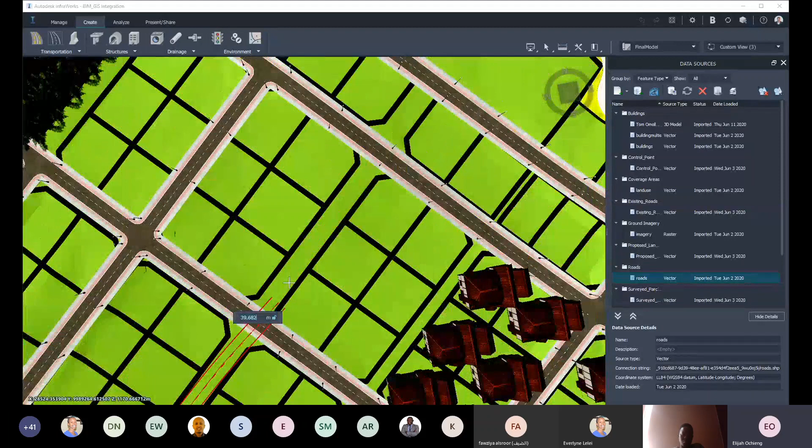This also enables you as a planner to know, when the designer is working, whether the road corridors you have provided are adequate based on the size of the design they want to work with. Remember there are various guidelines guiding the sizes of road you should allow for based on the kind of development you're working in.

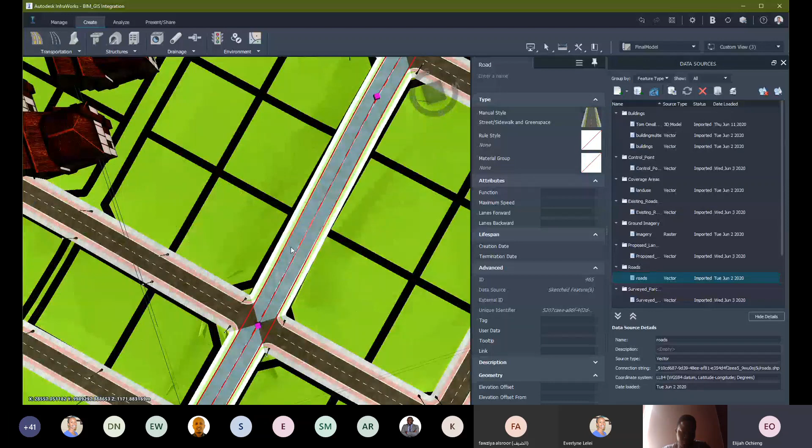Once I've done it, I just double click to end it there. So that was starting off from a planning road perspective. But since I'm also at the design stage at the same point, I was just checking whether the space the planner provided is suitable for the road I want to design. I've seen that the road fits within that particular corridor.

So the next thing is to convert this to a design road. I'll say convert, and convert it to a component road or design road. Once done, it will quickly allow me more control of the road in terms of quantities and the vertical geometry of the road.

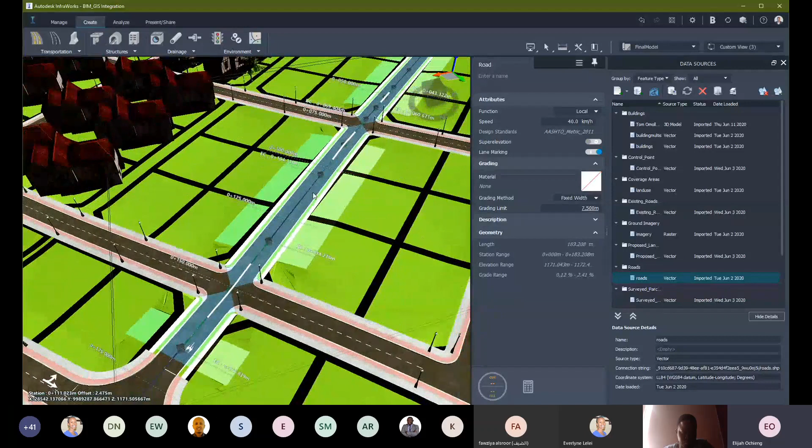I can quickly go into the profile view of the road to understand how it runs with respect to the existing ground, for example. But those are more engineering details I don't want to go into.

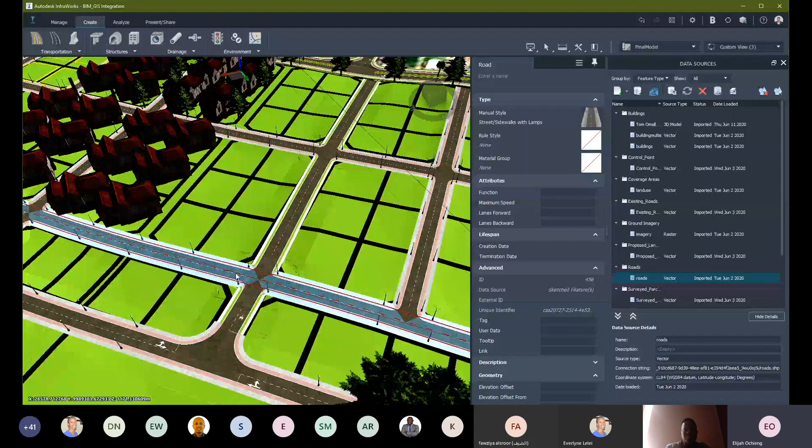Something of interest also: if I want to create a junction or an intersection, you can convert two roads into a component road, and immediately that is done, you'll have a more interactive junction where you can quickly understand how vehicles will be flowing, the left turns, right turns, the curb returns, and so on.

So basically these are the smaller details that designers and planners should have in place when planning for a particular area. Those are some of the information you can quickly analyze.

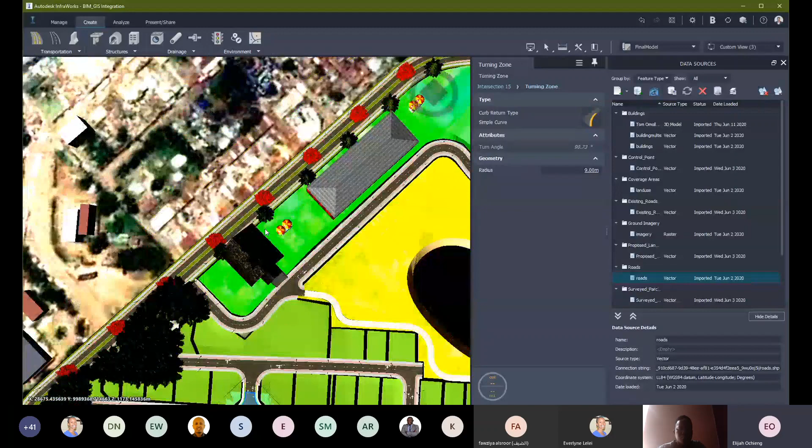You can also perform things like traffic simulation analysis, because remember we said this development will be attracting more traffic, and more traffic will also be generated from it.

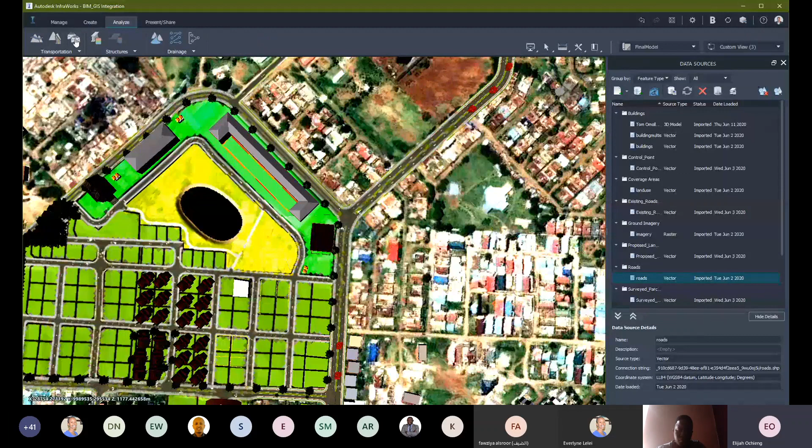So what is the impact of that particular traffic on the existing infrastructure within the surrounding area? InfraWorks also allows you to perform that analysis. I'll just go into the Analyze tab to show that. If I click on traffic, it will show me the features that I've already created.

I've done this before and defined a traffic study area. So I'll run the traffic simulation quickly, based on the traffic within the existing area and what you have within the development that you are planning. Ideally, you've seen people sitting on the road with papers writing down information.

That's basically what should inform the number of traffic that you have, before you start the analysis. You should have the actual traffic data on the ground, and the data projected for the people who are going to occupy that new development, so you don't design and then suddenly within two months people are already experiencing traffic.

There are more analyses you can do, like the potential for flooding of that particular area — you can know how it's going to flood. You can also do mobility simulation, like checking if you've provided adequate footpaths, cycle tracks, and other related infrastructure. I'll give it a few seconds.

I think it's almost done, so I can quickly show you how it displays the various vehicles flowing in this kind of analysis. When I click play, you can see it shows how a vehicle coming from one point can maneuver to its destination.

This still requires more analysis and input, like knowing the origin and destination — for example, if someone wants to move from this residential estate to a nearby shopping mall, what's the convenience and ease with which they'll identify and reach that area, based on the infrastructure you've provided in addition to what already existed.

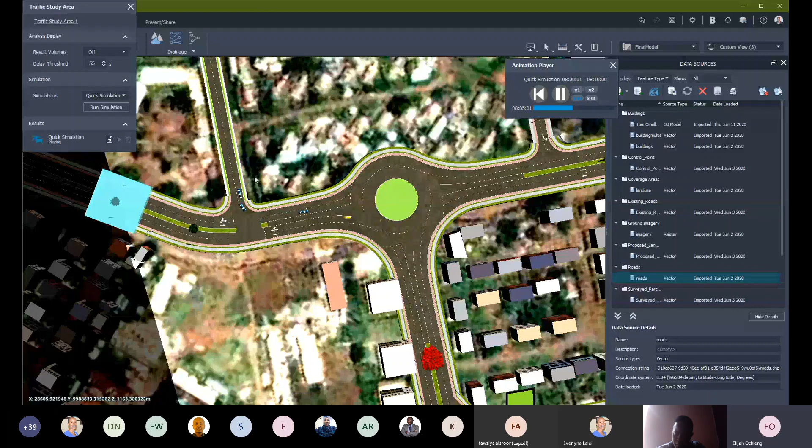So those are some of the quick analyses you can do — just to mention one of them. I'll exit from that traffic simulation now.

Presentation with InfraWorks is also very easy — you don't need to do a PowerPoint presentation. I'll just assume you've finished your design.

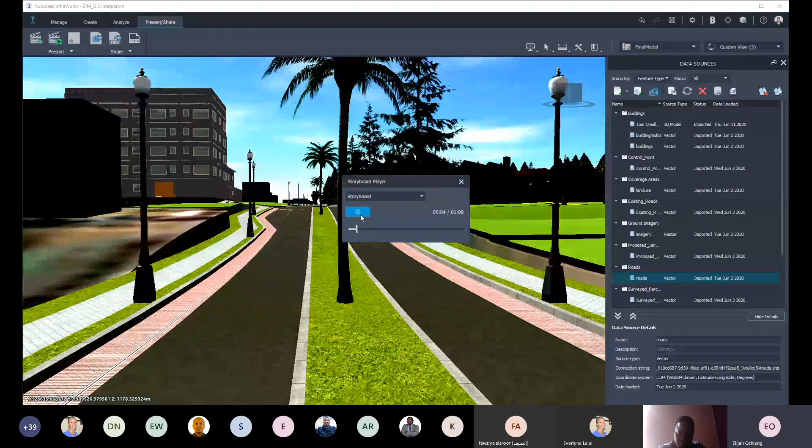If you want to present, it allows you to create workflows, walkthroughs and videos, which you can sit down with clients or non-technical stakeholders to show them, quickly, whatever you are proposing as a planner, designer, or a combination of both.

So you're showing that this is the road you are going to do, these are the various junctions. When it's done, you'll have these footwalks or footpaths, the street lights will look like this, and these are the trees we must plant, just to enhance conservation.

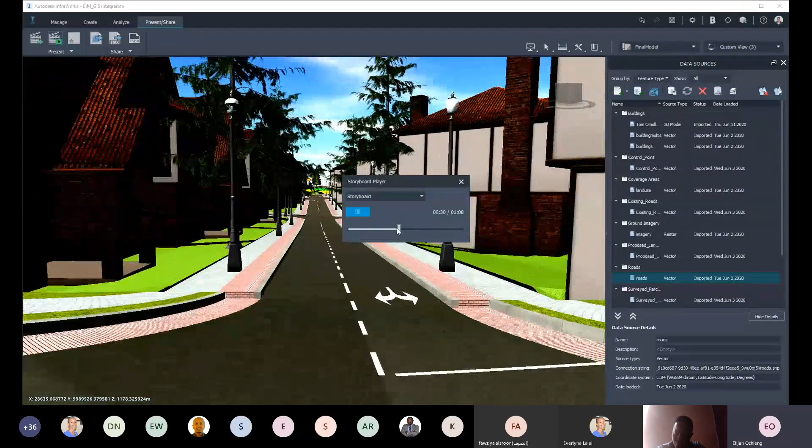You generate this kind of video, which you can export and share, and play via any other media player.

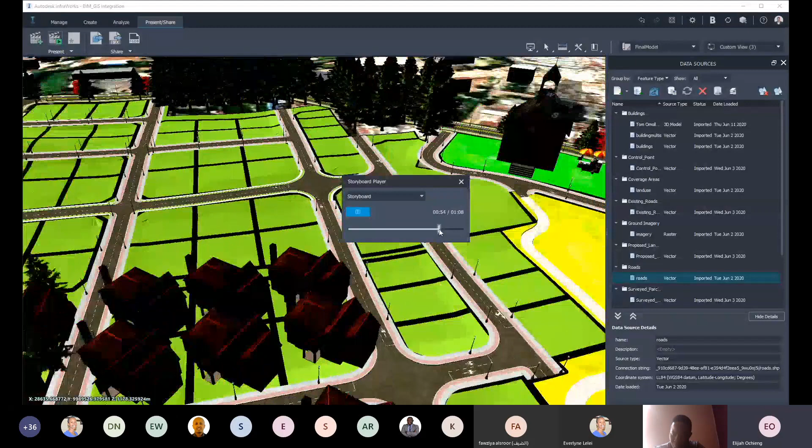So, once it's done, we'll have a church, this will be the recreational area with a church and a swimming pool, but we also have to do some conservation, planting trees and things like this based on the plan you have generated.

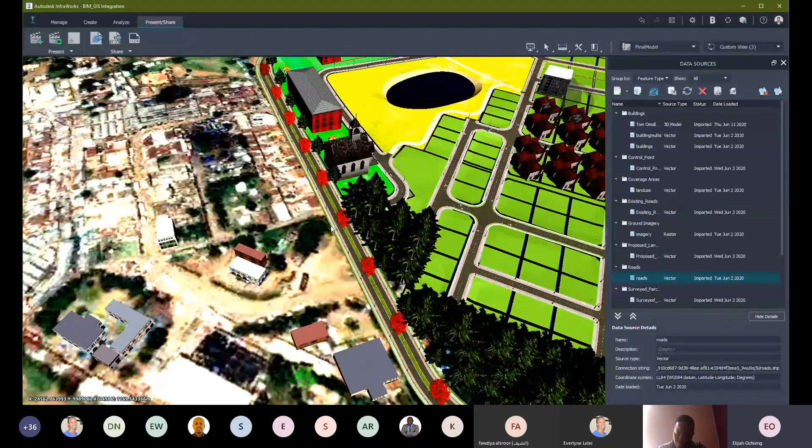Whether it's going to be approved or not, making changes and updates will be very simple and easier. For example, what I have here is a building designed in Revit, which has been brought into InfraWorks to incorporate the context and content based on what you are working on as the designer.

So basically that's what we had planned to do. Because of time, we don't want to go further than that, so maybe we'll quickly take questions if there are any.

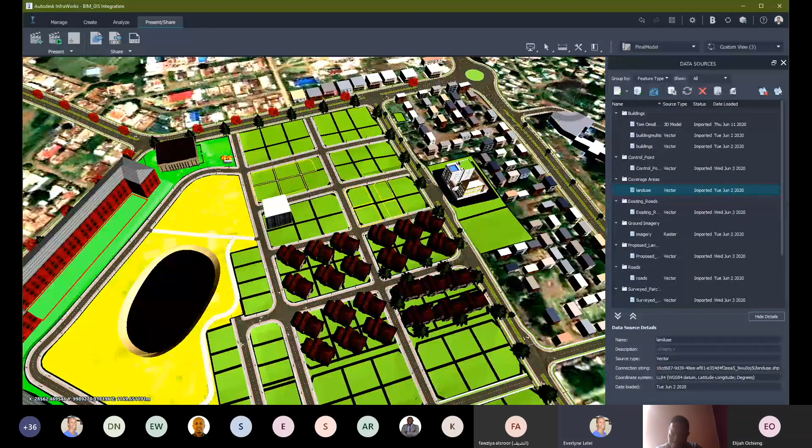Thank you, Elijah. So the purpose of this presentation was to show how integrating both GIS and BIM is possible, just to streamline the various workflows of built environment professionals, with a focus on real estate. Yes, so thank you — I think we can now take questions.